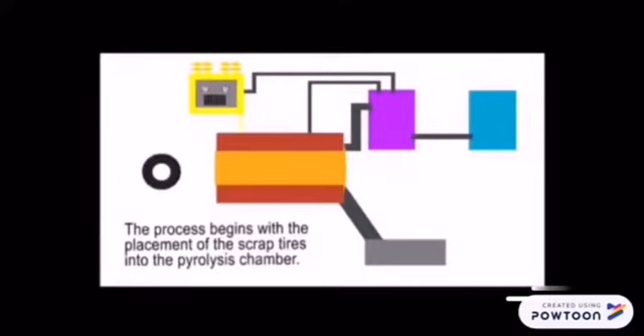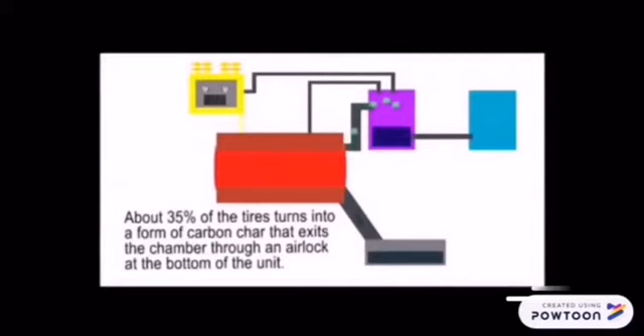The process begins with the placement of the scrap tires into the pyrolysis chamber. The door to the chamber is closed and the chamber is heated. As the rubber heats, two chemical changes occur. Approximately 55% of the mass of the tires is converted to a gas that exits the chamber through an airlock pipe. About 35% of the tires turn into a form of carbon char that exits the chamber through an airlock at the bottom of the unit.

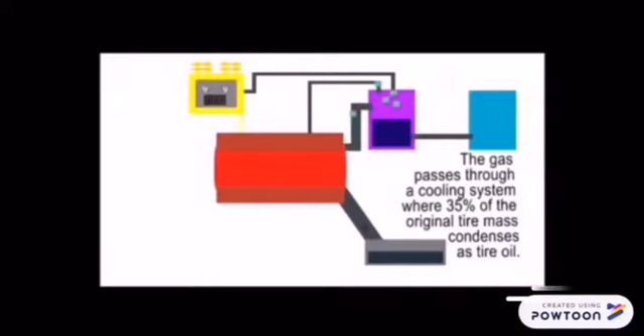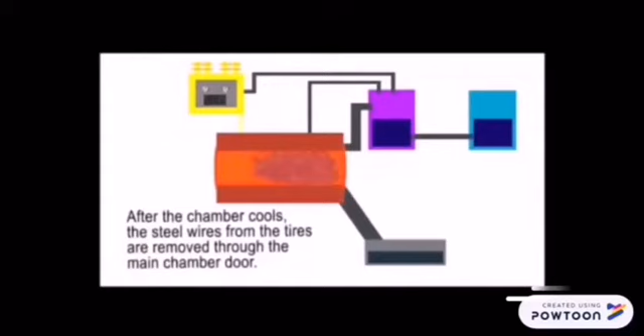The gas passes through a cooling system where 35% of the original tire mass condenses as tire oil. It passes through a filter and is used to fuel the furnaces that generate heat for pyrolysis, and also fuels a generator that produces electricity for the plant and for sale to the grid. After the chamber cools, the steel wires from the tires are removed through the main chamber door.

The pyrolysis oil can be widely used as a fuel oil in industries such as steel and cement factories, boiler heating, and heavy oil generators. Even though this process requires a high initial cost, for economic reasons, pyrolytic oil is usually considered the most easily sellable product on the market. Thus, the pyrolysis process is recommended in managing waste tires to preserve a better environment for our future generations.